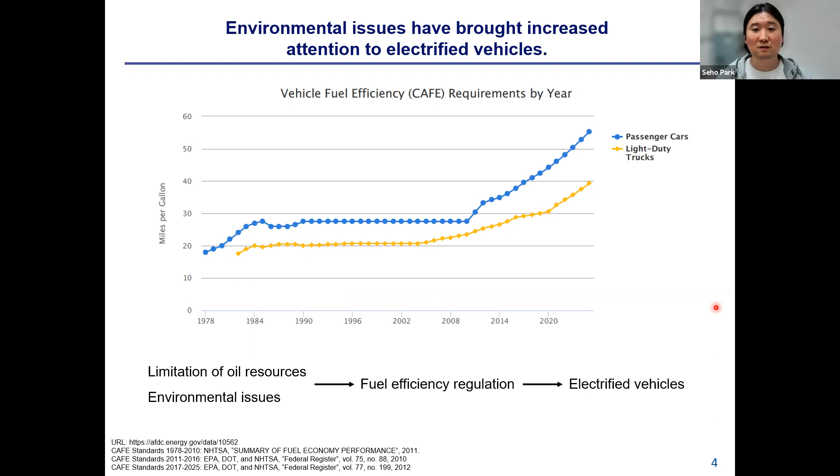Electrified vehicle efficiency is affected by many factors, such as hardware and software. The examples of hardware are vehicle weight, powertrain architecture, and component efficiencies. And the examples of software are control strategies. In this research, we will focus on the control strategy.

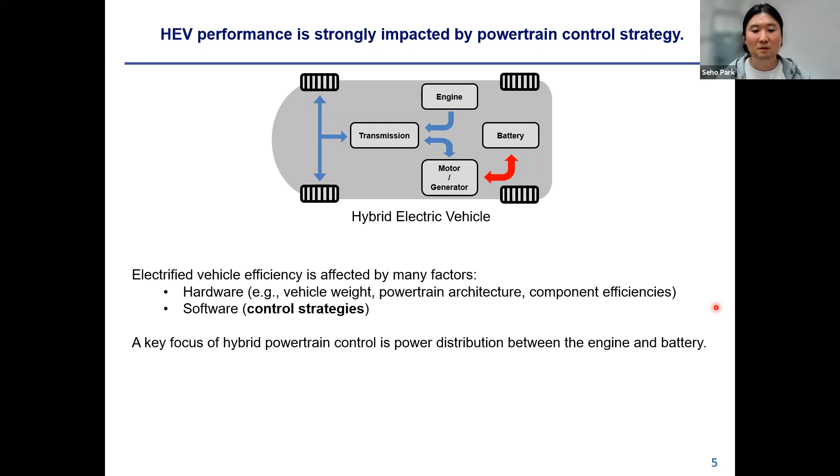A key focus of hybrid powertrain control is power distribution between the engine and battery, because they are power sources of the system. One side of the power source is engine, so we can increase the system efficiency by operating the engine at high efficiency points. So many typical power management controllers have been focused on minimizing the vehicle fuel consumption.

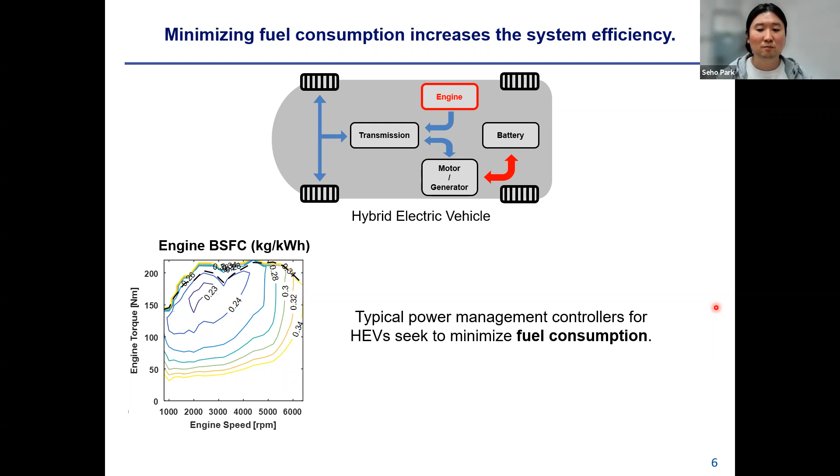Another side of the power source is the battery. The battery capacity decreases as the battery cycle increases, and the battery capacity fade decreases vehicle performance. The battery end of life is typically defined as time when capacity reaches 80% of its initial value, and this requires battery replacement with substantial sustainability costs. Therefore, minimization of battery degradation should be considered for control strategy.

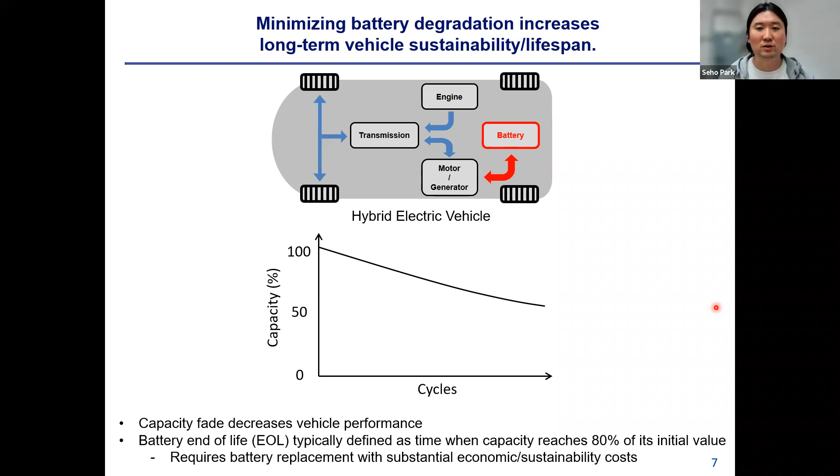Another important factor is the battery temperature, because battery efficiency, safety, and degradation are all impacted by operating temperature. While the vehicle is driving, the battery always generates heat, and the rate of degradation is faster at higher temperatures. And high temperatures bring greater safety risks. The critical point is that cooling the battery requires energy, which is often supplied by the battery itself. Therefore, the battery temperature should be considered for control strategy.

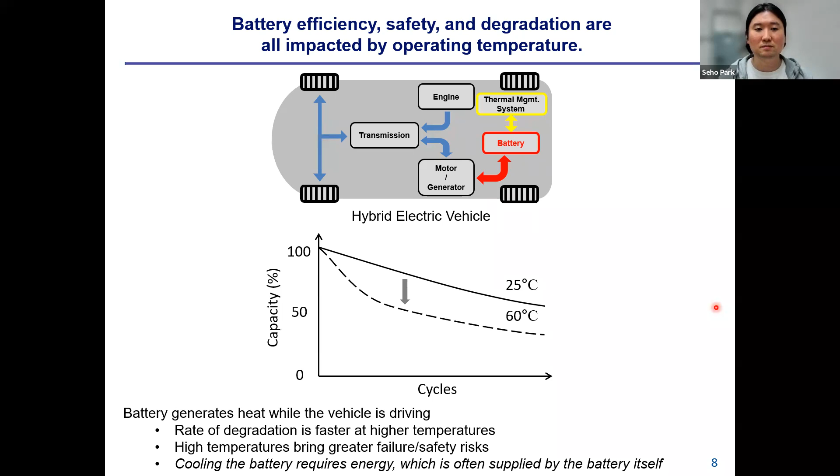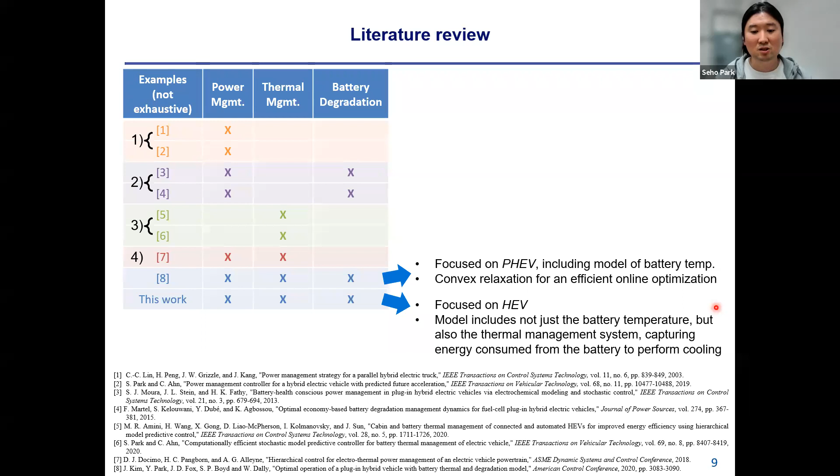The number 8 paper used the convex relaxation for an efficient online optimization, and it includes the battery temperature model. In this research, we extended the battery model to the battery cooling system. Therefore, we can capture the thermal management system, which can capture the energy consumption from the battery to perform the battery cooling.

Therefore, in this research, we propose an integrated power and thermal management with battery degradation controller, and it can consider trade-offs in short-term efficiency and long-term degradation.

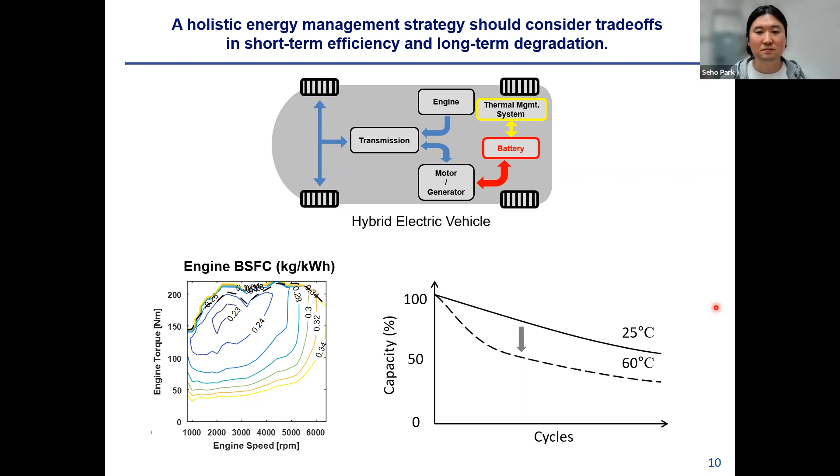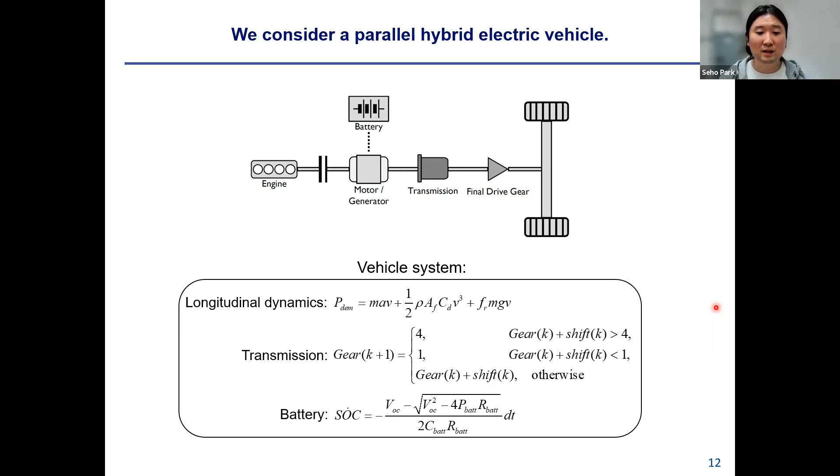Next part is system model. In this research, we consider a parallel hybrid electric vehicle for controller design and numerical simulation. Vehicle system can be represented with longitudinal dynamics, transmission, and battery. The details of the model can be found in our paper.

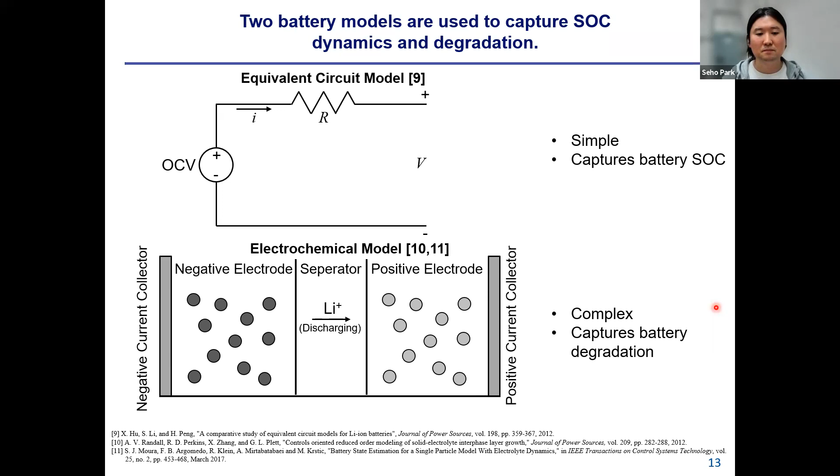We used two battery models to capture SOC dynamics and degradation. The equivalent circuit model is used to capture the battery SOC dynamics because it is simple and straightforward to represent. However, it cannot capture the battery degradation physics. Therefore, the electrochemical model is used to capture the battery degradation behavior. However, the electrochemical model is complex and it requires heavy computational load.

So we approximated the battery degradation as a static map to produce a control-oriented model. The battery degradation can be represented with a function of battery SOC, battery current, and temperature. And the figure shows the battery degradation with respect to current, SOC, and temperature. As you can see, the battery degradation increases as charge, SOC, and battery temperature increase. Irrespective of this, the general optimization approach can be extended to other battery degradation models and mechanisms.

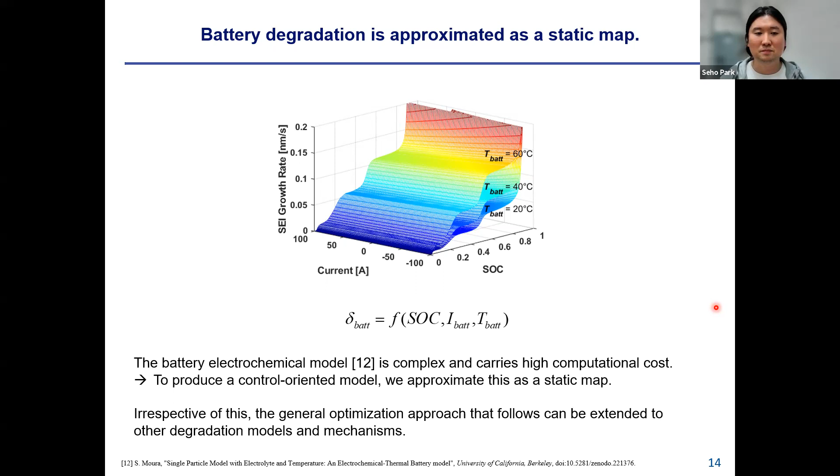For battery thermal management, an active cooling system is modeled. In the battery cooling system, the energy-consuming components are compressor and pump. They consume the battery energy. In other words, the thermal management system is powered by the battery, and thus reducing temperature comes at the cost of increasing discharge rate.

In the battery cooling system, the battery is modeled as lumped thermal capacitance, and the heat transfer between coolant and battery is modeled using a uniform wall temperature model. And at the evaporator, the heat transfer between refrigerant and coolant is modeled with a parallel flow heat transfer model.

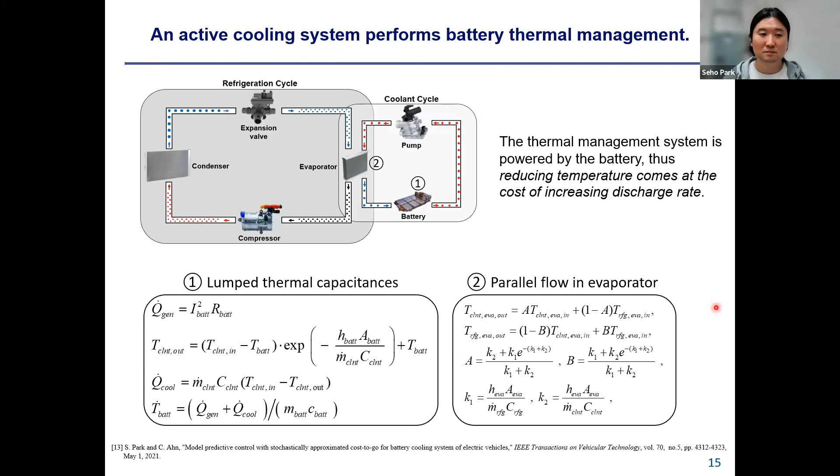Next part is controller design. In this research, dynamic programming is applied for open loop control design. Dynamic programming can solve the optimal controller problem by calculating the cost with all possible states and control inputs at every time step. Therefore, it can obtain global optimal performance.

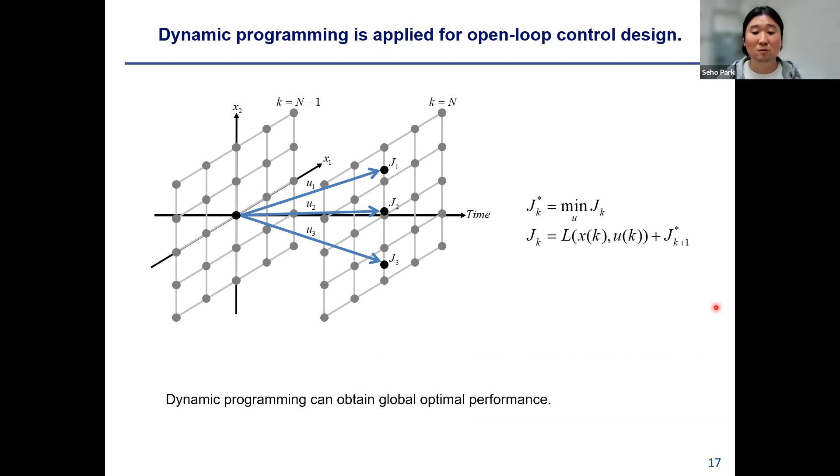We designed two controllers for numerical simulation. First one is the power management controller. The cost function is the sum of fuel consumption, battery degradation, and final SOC deviation. The system states are gear and SOC, and control inputs are gear shift and engine torque. The disturbance is power demand. The inequality constraints are operating constraints, and equality constraints are system dynamics.

The second controller is the integrated power and thermal management controller. The cost function is the same as the first one. However, the system states are extended to battery temperature and coolant temperature, and the control inputs are extended to pump speed and compressor speed. The inequality and equality constraints are extended to operating constraints and system dynamics, respectively.

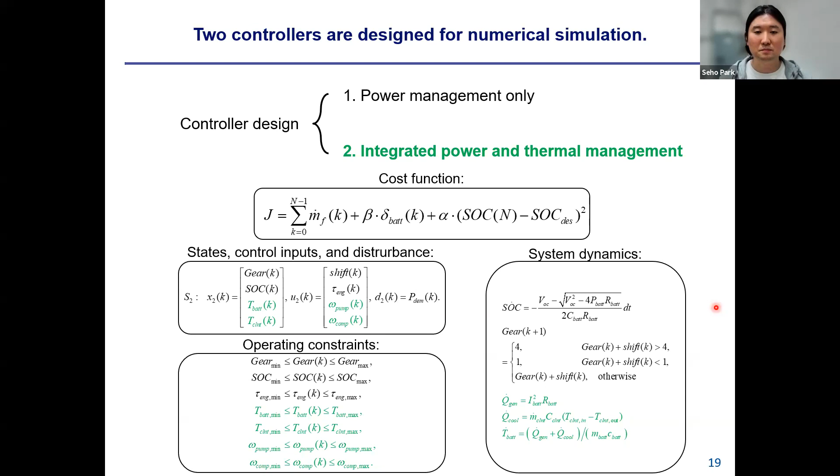Next part is simulation results. This page shows the results of power management with and without battery degradation. In the case without battery degradation, the tuning parameter was selected as 0. The left figure shows the SOC trajectories. The blue line is the result of power management with battery degradation. As you can see, the blue line operates at the lower SOC boundary for small battery degradation.

By doing so, the power management with battery degradation decreased the battery degradation by 33% at the cost of fuel economy, 2.45 miles per gallon. These results show that including battery degradation in the cost function provides an explicit trade-off between short-term and long-term costs. These results align with the referenced paper, which considered power management with degradation, but not thermal management.

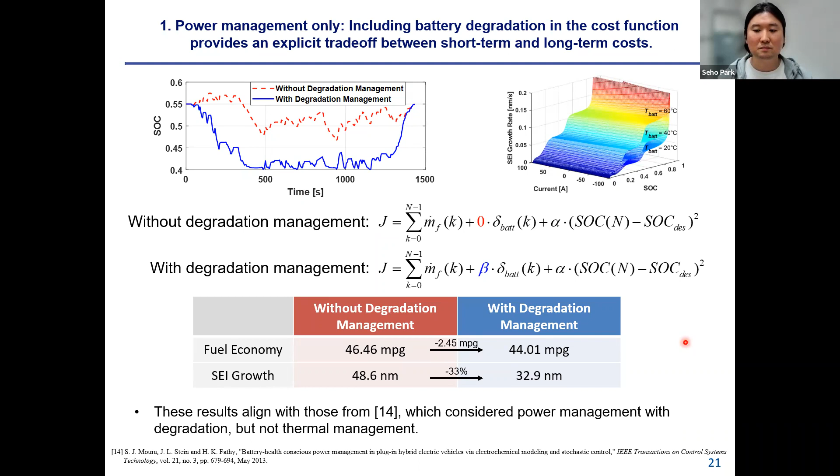This page shows the battery thermodynamics impact on the battery degradation. The blue line is the result of power management with thermodynamics. As you can see, the blue line shows higher battery degradation because of the battery temperature. In summary, the case with thermodynamics increased the battery degradation by 31%. Therefore, we should consider thermal management in the control strategy.

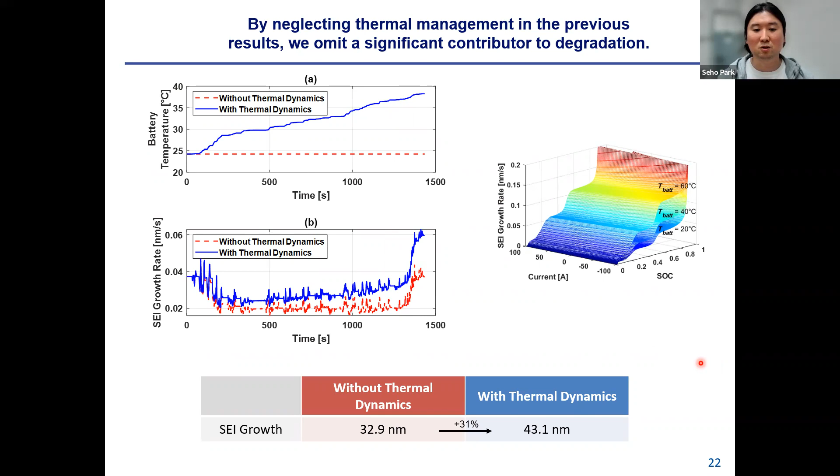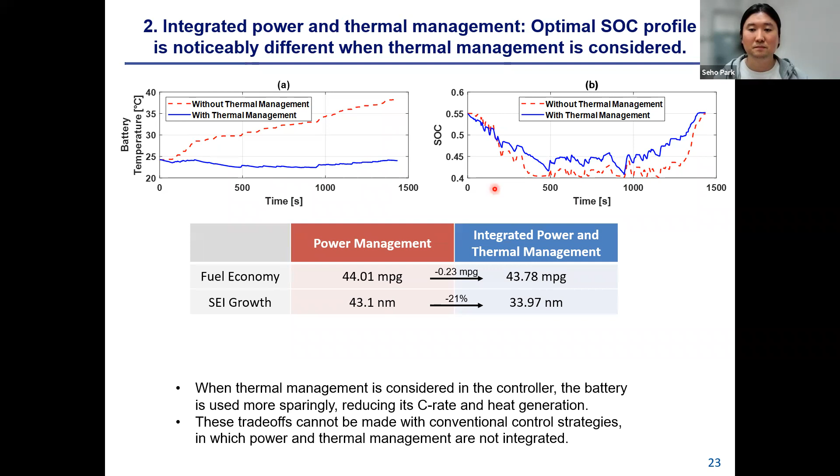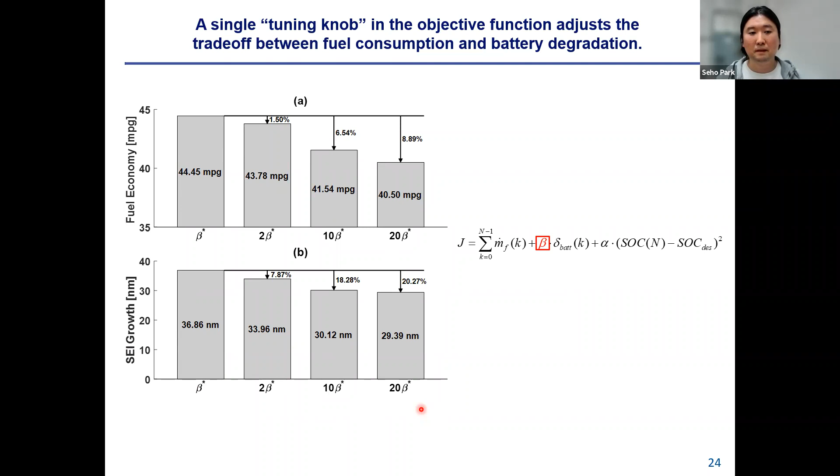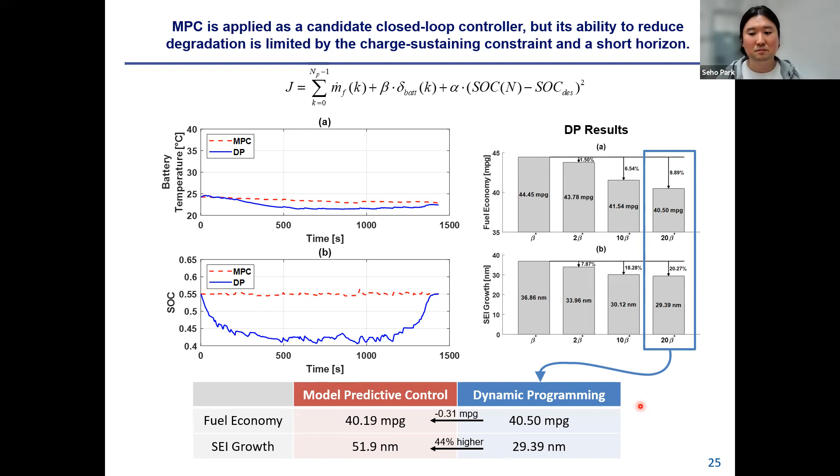In conclusion, we proposed an integrated controller for hybrid electric vehicle power and thermal management with battery degradation. We provide a tuning knob between short-term and long-term trade-offs in sustainability and cost. Our ongoing work is focused on closed-loop control strategies that more closely match the dynamic programming performance.